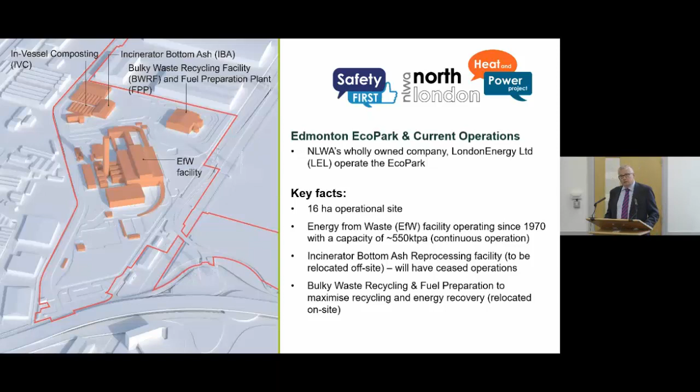That is a graphic showing the existing facility, and you can see the red outline of what we call the EcoPark, that's the existing site. That's an aerial shot, artist's impression of the new facility. The big grey rectangle in the middle is the finished state after the demolition of the existing energy from waste facility. You can probably gauge that there is not a lot of construction space on site. So hence we have leased an area to the right, which is called a temporary laydown area, and that's currently under construction. That will be available for the use of the EcoPark South contract.

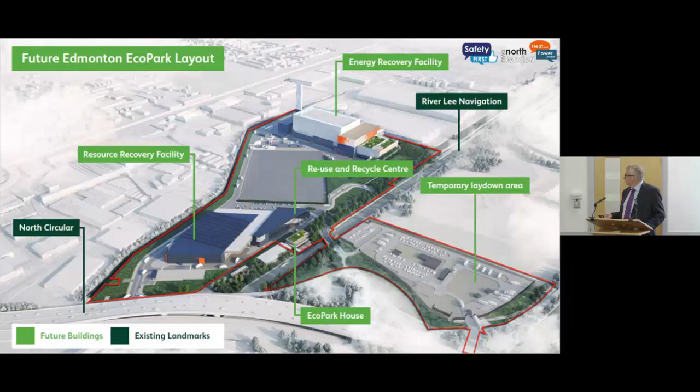What's important to us as a client, successful outcomes on this project don't just relate to time, cost and quality, although those are extremely important. We want you to help us deliver our vision, and I'll come to that in a minute. We've already maintained our ambition for excellence in health and safety and well-being, and we make no apologies for the fact that this will be a recurring theme through the presentation.

It's extremely important that operations on the existing site are maintained whilst construction is underway. It is already a busy site with a lot of vehicle movements, as you can expect, on a waste management facility. But we have an excellent relationship with LEL, the site operator, who have assisted us in planning this project so far, and with whom we will continue to collaborate closely to make sure construction and operation are optimised and can work effectively side by side.

It's also very important to us that the project is a positive role model for employment relations. We have developed an employment relations code of practice, which reflects good practice in ensuring fair and equitable terms and conditions for all our employees.

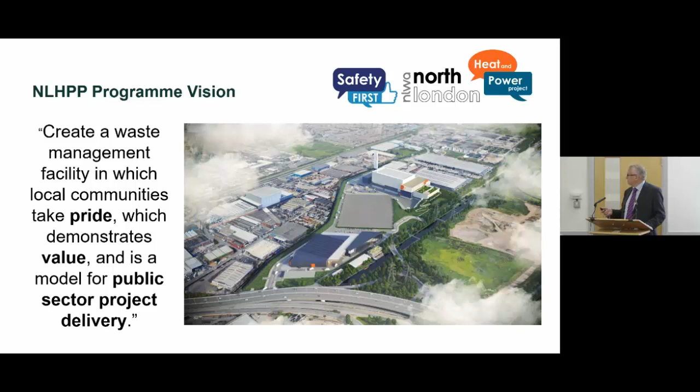Our safety first culture - this is the first and not the last time that safety will occur. Obviously, it's down to our delivery partners, the principal contractors, who have a legal obligation to manage safety on their sites. But we want to work with you very closely to make sure you achieve our aspirations on our behalf for zero incidents on this site, and we will work in partnership with you.

I know it's only a badge, but safety first is really important to us, and we stand by that. No job is so important that it should not be done with safety as a priority, and no compromise in that respect.

The project we're talking about today, EcoPark South, is part of a programme of work. The programme is already underway. There are some contracts being undertaken under the banner of preparatory works - the laydown area, creating new accesses for operational and construction traffic, and some of the enabling works which are predecessors to the EcoPark South contract.

EcoPark South works is indicated there. It will begin in 2020 and end in '23, that will enable us to transfer current operations from the north of the EcoPark site - waste management, waste preparation activities - to allow us then to build the energy recovery facility at the north of the site. Once the ERF is operational and proven, then we will decommission and demolish the existing energy from waste facility.

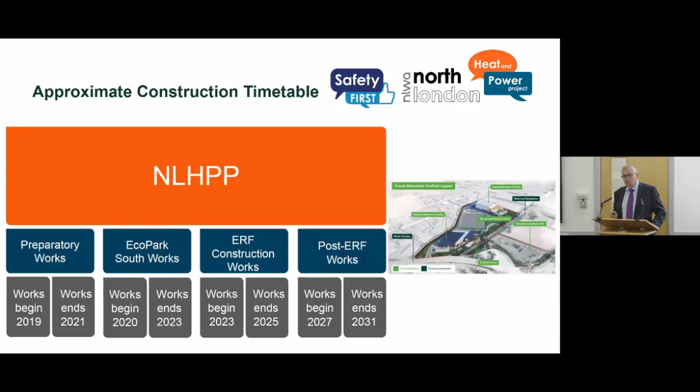It is a very constrained site. Things have to be carried out in a particular order. There's not much opportunity for paralleling up work, and so we are very schedule driven on this project.

Now going to get to the meat of the presentation. I'm going to hand over to Matt Ray, who is the project manager for the EcoPark South project. Thanks, David.

Thank you, David. So, as David introduced me, I have a habit of wandering away. Someone shout when I do, because no one online will hear when I do.

As David introduced me, I'm the project manager for the EcoPark South package and part of David's team. David's wider team includes all the functions you'd expect on a major programme, but includes several project managers. And as you'll have seen, there's packages of work, and each has its own project manager.

So I'm going to take you through the scope of the works in the EcoPark South package, through the programme, the schedule for the works, and then towards the end, some other random thoughts I had that you might be interested in when I've attended these before.

So the EcoPark South package has four major elements, and I unashamedly have cropped the whole site that you saw David using to just the southern part of the site, to avoid you getting excited about the large energy from waste plant that comes later. But we're focusing on the south of the site.

So there are four major elements to the construction works in this package. The resource recycling facility, the large building or combination of buildings you can see on the left-hand side. EcoPark House, which is a much smaller building with a planted roof, alongside the River Lee, which is that lovely grey river just in front of it. There is then also a programme of utility works particularly around the resource recycling facility.

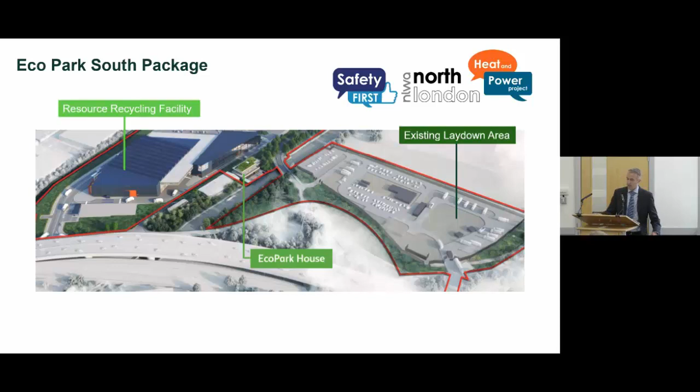So, moving into the resource and recycling centre. It's the large building you can see, and EcoPark House is to the right of it on this shot. It's an artist's impression, but it's part of architecturally sympathetic buildings that exist across the site. This is taken from the north of the site, where you have the very large energy recovery facility, and as you move towards the River Lee and the more publicly accessible footpaths along it, the buildings sympathetically become smaller in scale. Thank you to our architects who gave me that.

Practically, it's an industrial building. We are going to process in excess of 400,000 tonnes of waste. It is an industrial building, but because it can be seen from all the people queuing on the North Circular and from the River Lee, we aim for it to be pleasing to the eye and architecturally pleasant.

It's lovely, but what does it do? The buildings have been designed as a group, with safety and sustainability in mind. David highlighted with his example how important safety during construction is to us, but also Mark from London Energy Limited, our operator, never lets us forget that he's got to live with it long after the constructors have gone.

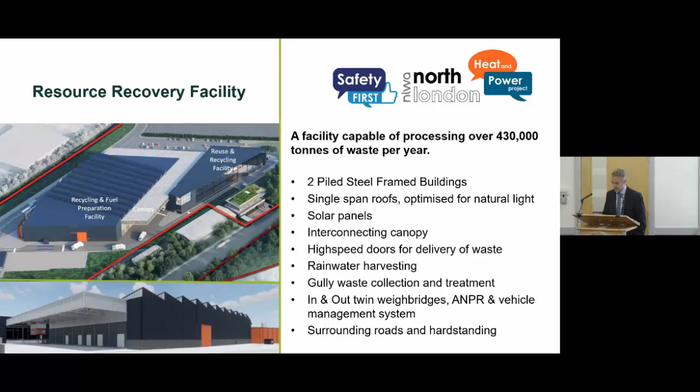It's beautiful on the outside and beautiful on the inside. So the building is designed with safety in mind. It is a large building — the large building we're looking at here, the reuse and recycling, resource and recovery facility.

On the left is a large lattice roof structure, ensuring that the 74-metre canopy can stand up without concrete pillars in the middle or steel columns. This maximises usability for the operator, London Energy, and also safety, ensuring there's less for refuse vehicles to crash into.

Inside, as you can see in the bottom picture, is a series of waste bunkers and push walls to enable the waste to be sorted and stored in accordance with current regulations regarding the size and scale waste piles can be. This ensures, from a safety perspective, that the operator can never inadvertently store enormous piles of waste with the issues and fire hazards that can bring.

Suspended within the roof are some mezzanine plant floors containing the sort of equipment you'd expect in a large industrial building. The orange section in the top right-hand corner of the left building is a crow's nest and control centre. With safety in mind again, this enables operations inside and outside the building to be conducted and optimised safely, since it has visibility of the roads around, keeping operators away from the moving vehicles.

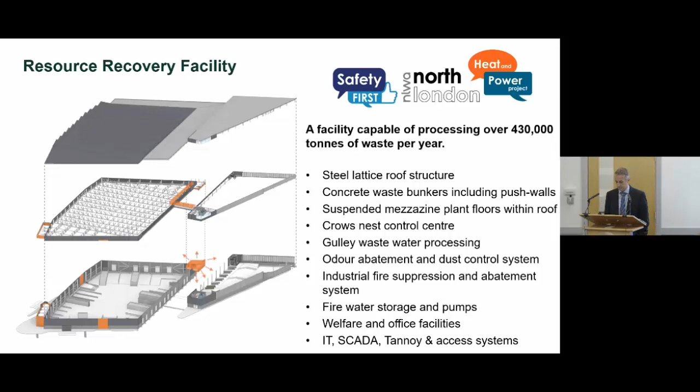I also mentioned what we call EcoPark House. So EcoPark House is our visitor reception. It's a centre for waste education.

To help, one of the roles the Waste Authority has is to educate the public and to try and use that to improve recycling rates. And we see EcoPark House as being the centre for that.

It will also be home to a local group, the Edmonton Sea Cadets, and they currently occupy the site that this building will go on. It will also contain public space, potentially to be used for exhibitions and the like.

It's much softer in nature, much less industrial, and that follows through both externally and internally in the fit-out. It's been described as a pavilion.

You going to play cricket on the EcoPark, Mark?

Possibly. But taking the Sea Cadets occupancy a little bit further, it looks like a boathouse. It's been designed to sit alongside the River Lee as a boathouse.

Physically, it sits on a sort of island from the main eco-park, and that makes it ideal to use for public reception and for visitors.

So inside it, as I mentioned, the Edmonton Sea Cadets currently occupy this site. So there is some level of demolition of those buildings to do. The buildings they occupy, it's one of those stories that I don't think anyone quite knows how they ended up there, but the buildings appear to be left over from construction of the North Circular.

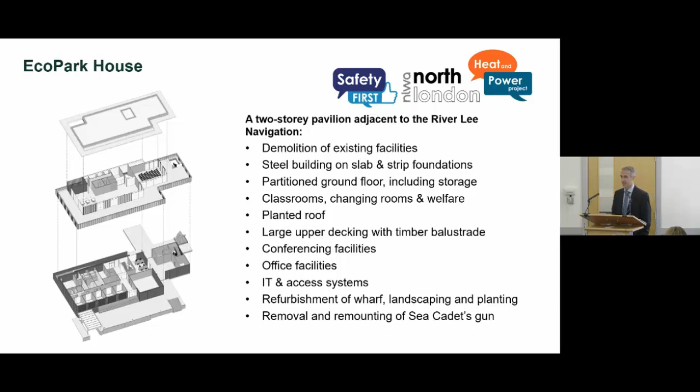So the other area I talked about was around the utilities, as I mentioned at the beginning. As a large industrial site, we obviously have need for all the utilities you would expect of such a site. Initially, there will need to be a level of diverting and decommissioning some existing services, which we've identified with the help of Mark's team and investigations we've carried out of documentation and on site physically.

As there is no energy recovery facility at the moment, what we have designed is a physical space for these. We know what we need, but until the energy recovery facility is constructed, some of it, the rings for power, can't be installed. So the work for this, for EcoPark South, will be 2 phases. One is to install service culverts along the routes we've identified in the model to accommodate the site-wide services, and then to install such services to enable the Resource Recovery Facility to operate.

What do they include? The things you would expect: potable water, wastewater drainage from the roads, foul water drainage, a fire main, clearly a high risk on sites such as this, surface water drainage, and I omitted to mention earlier that the waste handling buildings, from a sustainability perspective, we've put rainwater harvesting into those.

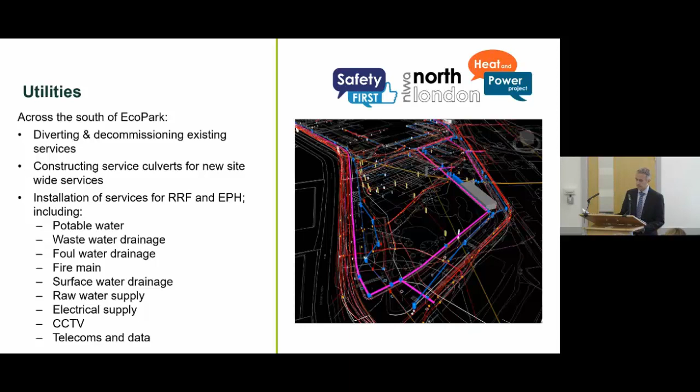We've produced a 3D model for these, and we have used all the information we've been able to gather on the site to carry out that 3D model, and that will be made available as part of the tender.

Some initial investigations have been undertaken, and now that we have a design overlaid on top of the existing site information, we're going through the process of carrying out further trial pits where there are obvious pinch points around the site, to make sure the existing information is correct around those key points, and that the design we are looking at is buildable.

Inevitably, with any utility services, there is some interaction with other parties. There will be some interaction with utility providers, although most of the services for this will come from the existing energy from waste plant in the centre of the site. So there will be some interaction with the current site operator, London Energy, Mark and his team, as we bring those services from the existing facility down to the south of the park.

As we go through the detailed design phase, the energy recovery facility will also be doing their design, and for those site-wide systems there will be an element of interface with them. Finally, there is also in the future, for the future plant, a connection to a district heating system. Those pipes need to come through the site, and we are looking for the EcoPark South contractor to install those pipes through their area. Again, adopting the approach: when we dig the site up, let's do it once, let's do it properly.

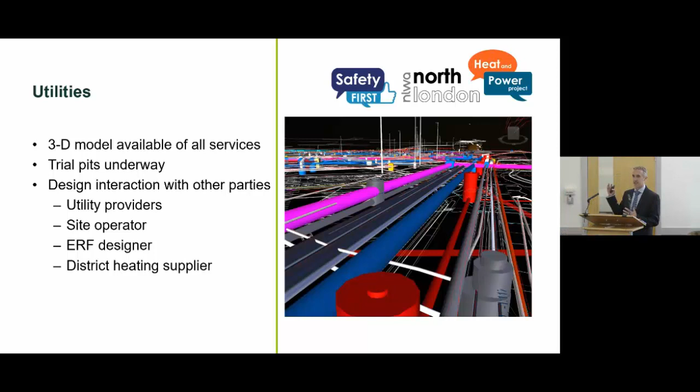So every project manager has an Excel plan, we know that, and as my planner's not in the room, I can share it with you, but if you bump into him, please don't tell him I've got one.

So my simplified schedule for the works: we are intending to use an NEC4 design and build contract with early contractor involvement for these works. My colleague Ursula will cover the contracting phase in more detail and talk to you further about the contract and how we will go about procuring that. So I won't steal Ursula's thunder on the green bars. The star on there denotes the area to the right that I will carry on talking about, which in essence is the pre-construction phase, or the early contractor involvement phase, and then the construction phase.

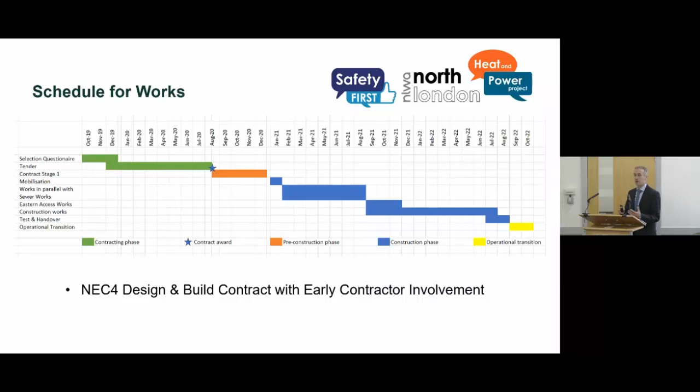So turning first to the pre-construction or early contractor involvement phase. This is typical of what you would expect in such a contract, and is focused on us mitigating risks and cost-efficient delivery. We are keen to make sure that when we go to construct this, and coming back to David's point, that here we are funded by the public, funded through taxpayers' money, it is vital to us that when we go to site, we are, the phrase I use, match fit. We understand the risks together, and we have done everything practical together to mitigate them.

And also with the expertise of yourselves, the contractors and your supply chain, we've had the opportunity to drive further value into this wherever we can.

So in mitigation of risk, we would have the opportunity to carry out further surveys where you see areas of risk that maybe we haven't. We'll have the opportunity to investigate further when you're aware of your supply chain, to understand how that will integrate with existing systems on site, to mitigate those all too familiar delays when we try and build it and the existing system wasn't quite how we expected it in the documentation.

We'll work as a co-located team. The key members from the contractors with any designers that are significantly involved, and you feel it would be appropriate to join us, with the client team, with North London Waste Authority, working together through that phase to ensure that we mitigate our risks and deliver cost efficiency.

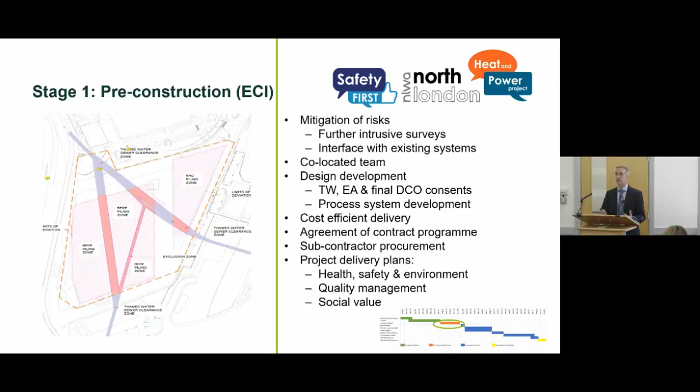So as we move into what I describe as the first phase of construction, the EcoPark South contractor will take responsibility for the laydown area and will take the role of principal contractor. The client, North London Waste Authority, will retain, because of all the other contracts, the role of principal designer.

Right at the bottom there, you can see the North Circular and the entrance to site, just off the North Circular through an industrial area. That entrance at the moment is used exclusively for the operator's waste vehicles. It will become an in-route for waste vehicles, as a route in and out of site for the EcoPark South contractor, and also for the sewer diversion contractor, who will continue doing their work at the same time as we begin.

That contractor will occupy and will be the principal contractor for the first 7 months of the 3 bluey-purple squares that you can see. The EcoPark South contractor will maintain a route, as shown by the blue lines, to access his 3 work sites. That's through the first 7 months.

There is also some unrelated works that David hasn't mentioned because they're not strictly part of the North London Heat and Power project. The red area at the bottom is a district heating network beginning to be constructed in readiness for connection to the future energy recovery facility.

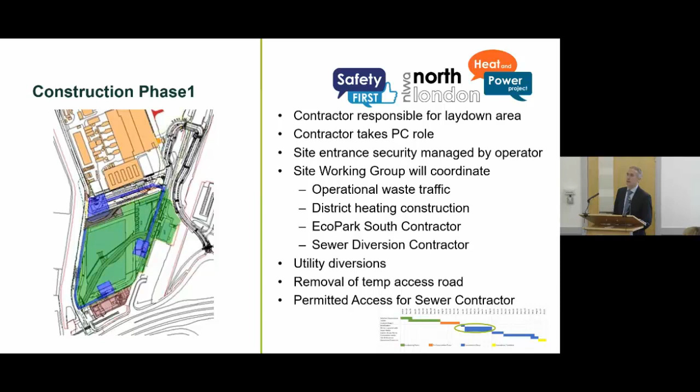So phase 1 continues for 7 months, while the sewer diversion contractor will also be operating. After 7 months, the sewer diversion contractor will have completed their works, and we move into what I call construction phase 2. Here the EcoPark South contractor has full and unrestricted access to the site. No longer does it need to maintain a route for other vehicles.

At the beginning of this is a 3-month window where the CDM area will be extended to the northeast, enabling utilities through that area to be constructed and a permanent down ramp to be built from the laydown area. Prior to that, it will have been a temporary stone ramp from the laydown area.

The district heating construction will continue. It's a relatively small facility, but they are constructing on a very small footprint, so they have quite an elongated programme.

At the end of the work, the EcoPark South contractor will undertake testing and commissioning of the facilities to demonstrate they are in accordance with the scope of the contract. Where you require the business process to be carried out to do that, London Energy will oblige by bringing you as much waste of the type you want, when you want it, and promises to take it away again once you've demonstrated it.

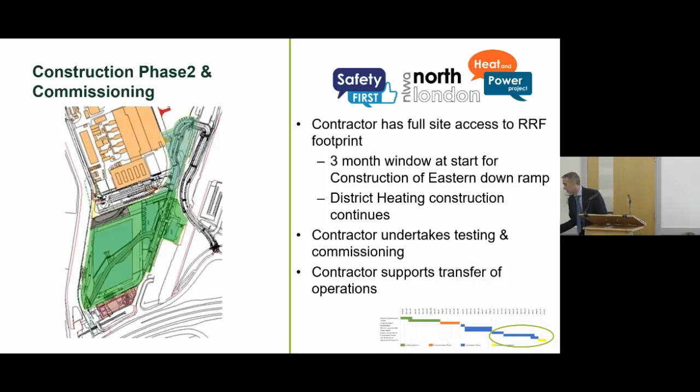So, having gone through the phasing and the arrangements for site, I thought I'd cover a few areas of interest, starting with the point to which we've developed the design, from where the contractor will adopt and further detail it. Our architectural design is at RIBA stage 3, and our technical design is at RIBA stage 2+. These designs have been accepted by the operator of the site as meeting the business requirements for his operations going forward.

Our reference design is generally bound by 3 things: the development consent order we obtained in 2017, the conditions discharged under that by the London Borough of Enfield, and the environmental permit that the site operates under. Those are our 3 guiding things.

So, taking the reference design I've described, the buildability of that design, as provided within the tender documents, sits with the EcoPark South contractor. The operability, the fact that the reference design meets the business process, remains with the client throughout this contract.

If the contractor wishes to amend the reference design as we've provided it, then they're welcome to do so, but they will take responsibility for obtaining amended consents that are required to do that and obtaining the agreement of the operator.

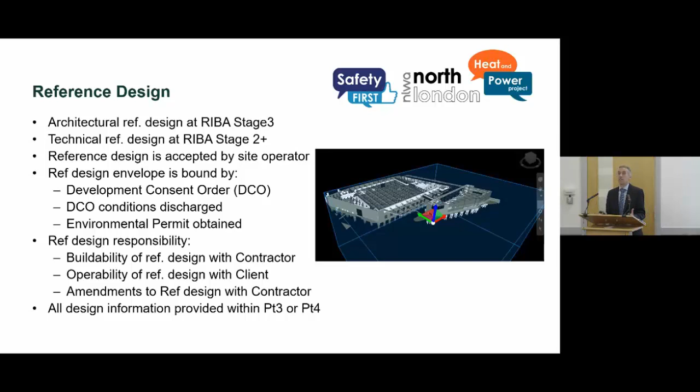So, the management of risk. We will adopt the standard NEC approach for risk management, in that we will allocate risk to the party or organisation most able to mitigate and control it. Up here I've given my thoughts on the risks on this project, the mitigation we've developed, and where the risk will lie as we go through the contract.

As David alluded to, the operations at the EcoPark have to continue. Mark tells me there's nowhere to store 3 years of North London's waste while we stop and build this, so that is key to this project. We've segregated the site to mitigate that risk as far as we can, giving the south of the park over to construction and the north of the park over to operations. We've developed the arrangements for the site working group so we understand how we work together, but if we have to move away from that to preserve operations, the client will retain that risk.

As is usual under the NEC contract, ground conditions is a risk, and it's one we will see split in the normal way: anticipated ground conditions, those that can be seen through the information we have and the extensive site investigation we've carried out, will lie with the contractor. Those that are unanticipated, and this is a historic site we haven't dug everywhere, will remain with the client.

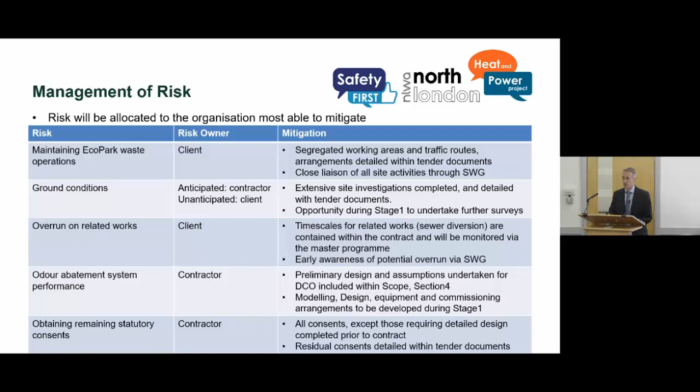David alluded to social value, and I thought it would be useful to share a little more of that with you. As we've said several times, this is a public project, funded by 7 North London boroughs, and it's very important to us that we provide lasting positive value in this area, in addition to the facility itself.

So through the contract we will deliver 20 apprenticeships of 12 months duration minimum. We will provide 60 weeks of on-site skills training to 5 people, and these people will not currently be involved in construction work. This is about upskilling people from other local areas, not people already trying to get into the construction industry.

For recruitment, where contractors are seeking to recruit people, we would seek engagement through local job centre pluses. And as Dave alluded to, we are also seeking social value through an employment relations code of conduct. What do we mean by that?

That will be shared again within the tender documentation. We would expect people working on this to have a right to work and to be PAYE through a company somewhere. We expect equality, to treat everybody with dignity and respect; diversity, that we embrace people's differences and the community we live and work in North London; and inclusion, that everybody's contribution to our project and wider programme is valued.

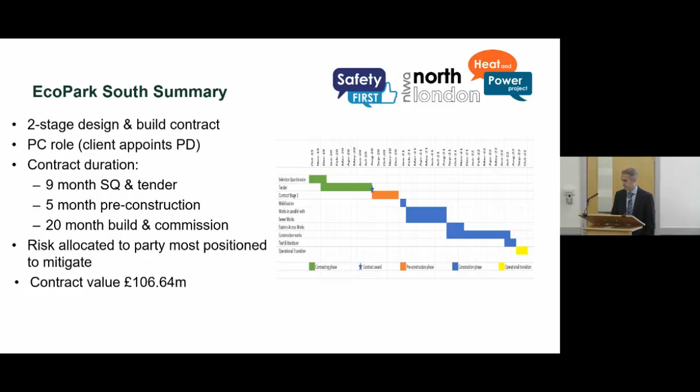I'd like Mark Beatty to come and give you a view from the operator of the site.

Good afternoon, ladies and gentlemen. London Energy is incredibly excited about having this state-of-the-art facility provided for us. We provide services to the North London Waste Authority, recycling and disposal services. We're wholly owned by the North London Waste Authority, they're our single shareholder, but we have an independent board of directors, and therefore our interests, whilst aligned with that of the authority, have to take care of our own business at the same time.

330 people operate across 8 facilities in North London, the largest being at the EcoPark. The current energy from waste plant powers 80,000 homes with the electricity it generates from the waste it burns. As has been mentioned, we've been chosen as the operator for the new facilities, and I want to reassure you that we've been involved in these designs from the beginning.

If you went back 3 years, the building, although it looks different, has absolutely a feel that we have contributed to every step of the way, and I think that should give you some reassurance, because you're not going to construct something and have us come along and say, actually, that's not what we wanted it to do instead. You've got this partnership working, which has been emphasised in what's been said before, and that's a commitment that we have.

My role, created specifically for this project, is supported by 5 other members of staff, but I have an entire business worth of professionals, people who know the waste industry as well as anybody does, people who understand how the Environment Agency permitting works, and we can draw on all of those as we need them within the business.

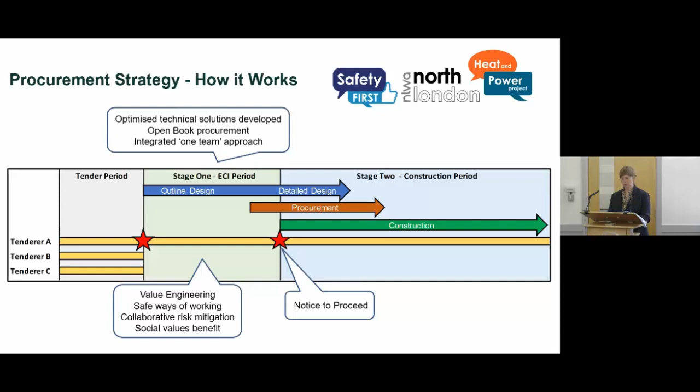So what will happen during that stage is that we will carry out these discussions, and the expectation is that at the end of the period we will have acquired sufficient certainty on the design, and sufficient certainty on meeting all the consents requirements that Matt referenced, to be able to issue a notice to proceed, which then leads us into construction.

Stage 2 - I won't run over what Matt said again, about the 7 months and then the later period, partly with the sewer diversion contractor. But you'll see from this slide that it goes through detailed design and ongoing procurement of your subcontractors into construction, and then handover at the end.

We'll continue the collaborative approach using the NEC4 contract, which encourages that. The shared risk and reward through pain-gain at the end is highlighted on this slide, at the end of the green arrow when we get to successful construction.

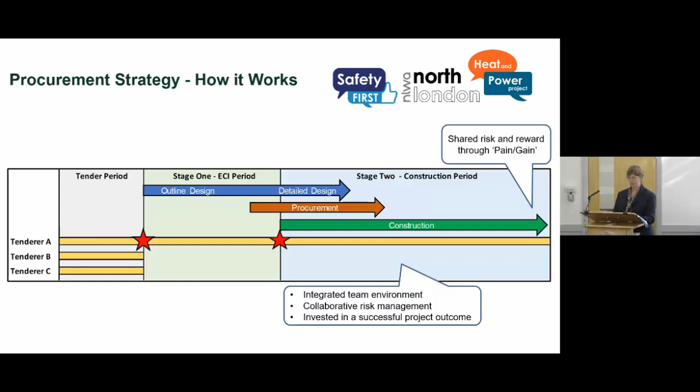Just a different format for the timetable. Our plan is that the OJEU notice should be out during October, at which point we will issue the selection questionnaire and other procurement documents.

You will have paperwork to tell you about the project, to allow you to work out - which I hope you will - that this is a project you're interested in, and detail about the points Matt's been raising earlier, so you can see for yourself through the design and drawings exactly what's happening.

A short selection questionnaire process, and in December we plan to issue an invitation to submit initial tenders. As we've said, the plan is that should go to 3 tenderers.

During March and April we'll have the negotiation period we referred to, so discuss submissions and improvement opportunities, and focus on specific issues that we think we can usefully discuss to get a good outcome.

In May we would then issue the invitation to submit final tenders, which we will then evaluate, and in August we would plan for the contract award, which would lead us into stage 1, the early contractor involvement, with a view to moving to stage 2 with the notice to proceed in January.

So I very much hope that process sounds sensible to you and convincing, and I'll move back over to David.